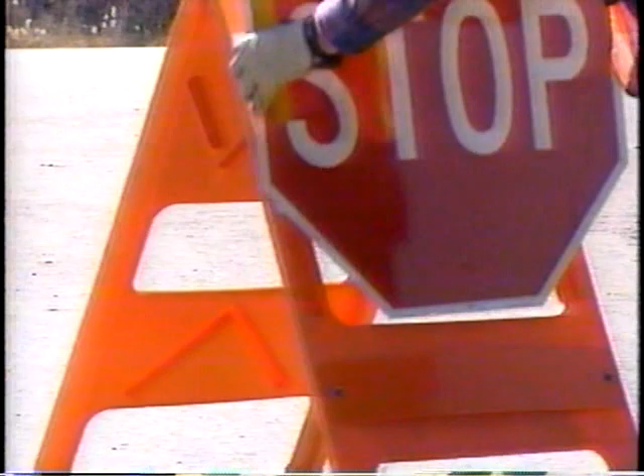This is a well-organized county with trucks that always carry key signs and necessary equipment so they can respond almost immediately to a dangerous situation. But they do much more than that to maintain signs in this rural county, and that's what this video is all about.

We'll show you a procedure that keeps track of all the signs in the county and sets priorities for needed maintenance and tracks that maintenance. You'll also see examples of the proper use of traffic control devices and typical field operations using the appropriate equipment for a specific job, the tools needed, and proper placement of signs.

We're going to take a closer look at each of these areas now here at the Riley County Road Maintenance Facility in Manhattan, Kansas.

Hi, Ken. Well, Ralph, how are you today? I'm fine, how are you? Ken, you've got a big county here, and it's mostly rural roads. I'm curious as to how you keep track of all the signs and markers, and as far as that goes, how do you know when a sign needs to be maintained?

Our traffic control department makes a regular inspection of all our roads. The low volume roads we do on a monthly basis, and our high volume roads we do every 2 weeks. We also do an annual nighttime inspection visually and drive all the roads. We also back this up with a retroreflectometer test.

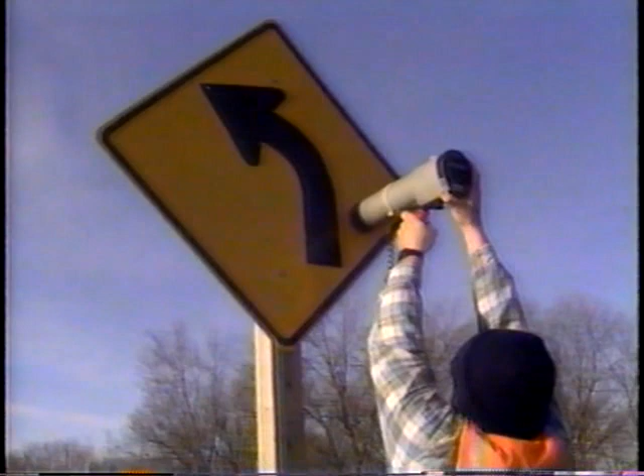I won't ask you to pronounce that again, but what is that? That is a device that will check the reflectivity of the sign and give us a meter reading as to the quality of the sign.

So after you've determined there's a problem, what's the procedure then? Any of the problems we find on these inspections would be put on a complaint form.

So there must be quite a pile of those things. How do you handle that? Well, the emergencies we take care of as soon as possible. The other problems are put on a work order master list from the complaint forms, and we have a large list. Then I assign that to the traffic control foreman, who prioritizes his work and schedules it on a daily basis to go to his crew.

So by keeping good records of all the problems reported in inspections, employee observations, or citizens' reports, you prioritize the needed maintenance, schedule and assign the work, and then record what the job involved and when it was completed. That must give you a pretty detailed history of about every sign in the county.

Yes, it does, and recently we converted all this information to a computer database so we can access it much quicker and easier. Well, Ken, I'll let you get back to work.

Thank you very much for the information. Appreciate you coming in. Thank you very much. Thank you.

The next step is out here. Before going out on the road, the repair trucks need to be equipped with the right signs and, of course, the right tools.

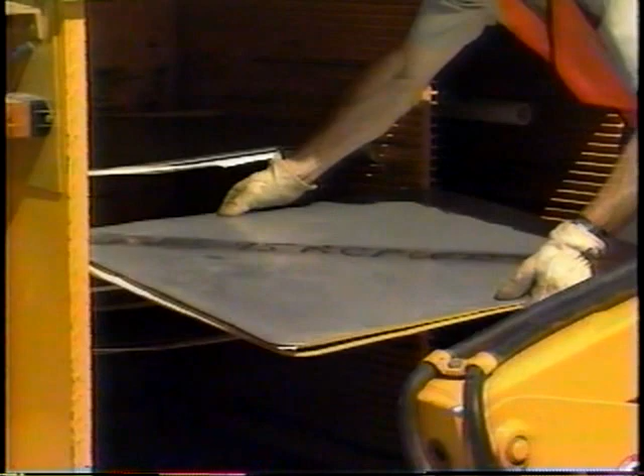All the key signs are kept on the truck, and they require special care. Whether stored vertically or horizontally, the sign face must be protected by placing some kind of packaging or protective wrapping between each and securing them so they don't rub against each other, keeping the packing material dry.

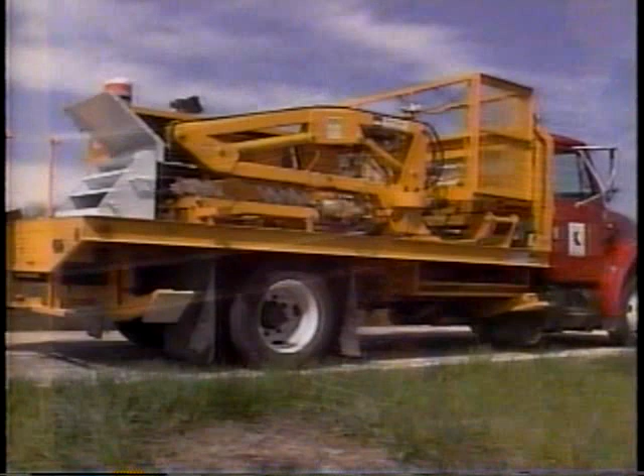A comprehensive list of common and necessary equipment and tools can be found in the pamphlet Maintenance of Small Traffic Signs. However, here are some not-so-common items found on Riley County trucks. Because of the flexible nature of carsonite posts, it's recommended you attach only one blank.

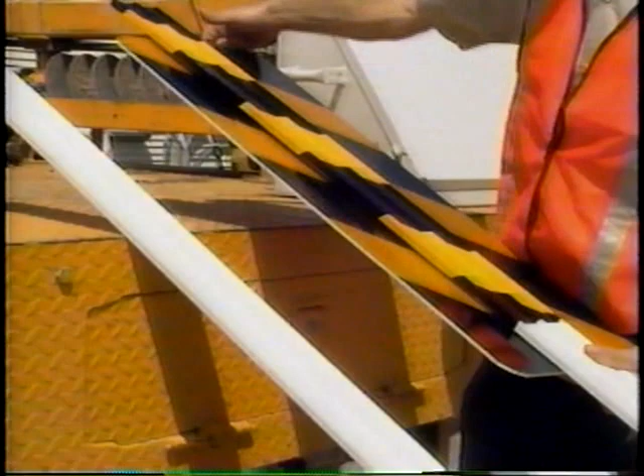On occasion, Riley County wanted the sign to be visible from both directions, so they made this modification. A face was applied to both sides of one blank, and the carsonite post was painted to match.

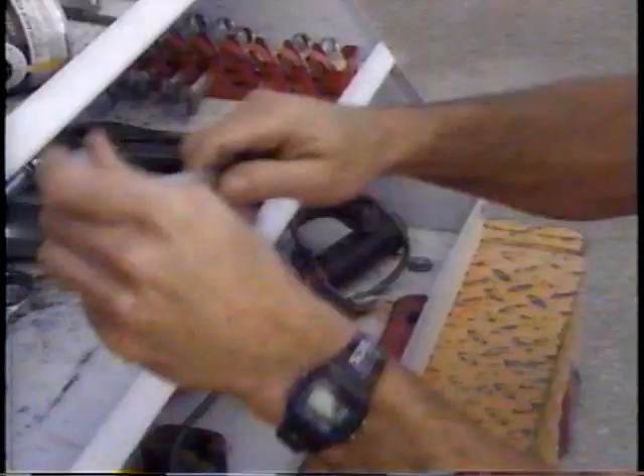The handle of this wrench was bent to facilitate the installation of tough nuts up next to the post. Tough nuts and Loctite are used with carriage bolts because they discourage vandalism.

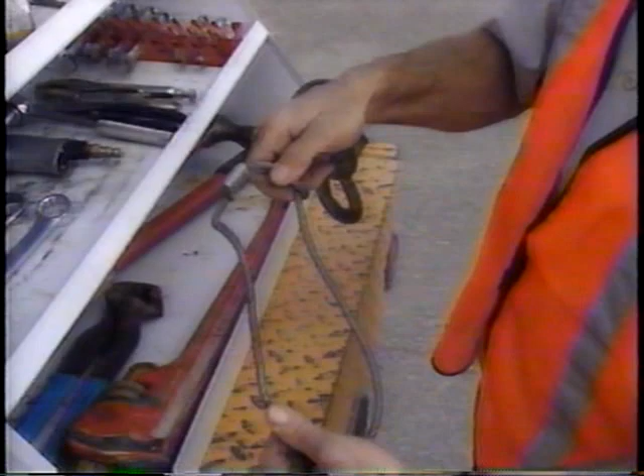A looped cable was made so it tightens around a wood post as it's pulled. This device is exactly 5 feet high and used to check the height of the bottom of a sign from the edge of the traveled way during installation.

All Riley County sign trucks are equipped with a ball bank indicator to frequently check curves and turns, and a distance measuring instrument, which determines the longitudinal placement of signs.

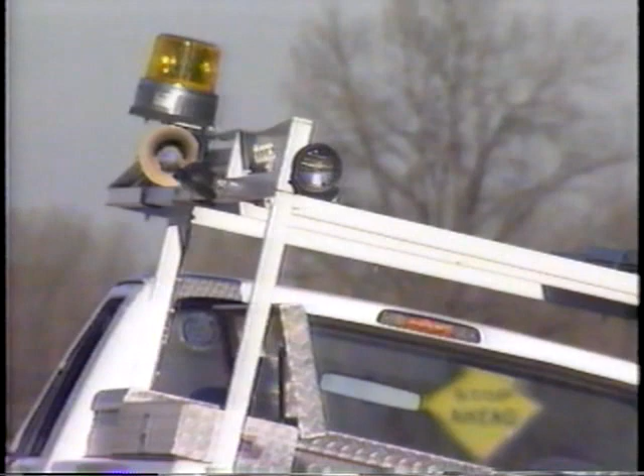Every truck should have these items for the protection of the crew: hard hat, gloves, ear protection, back brace, orange safety vests, cones, warning barricades, and flashing beacon. They also carry the Manual on Uniform Traffic Control Devices and the Kansas Handbook for Low-Volume Rural Roads.

We're going to show you 4 typical but very important operations: minor maintenance, sign and post installation, using a ball bank indicator to determine the need for either a curve or turn sign and if a speed advisory plate is required, and finally, object markers and delineators.

For each of these operations, we'll stress conformance to the standards and guidelines in the Manual on Uniform Traffic Control Devices, the Handbook of Traffic Control Practices for Low-Volume Rural Roads, and the Maintenance of Small Traffic Signs. Minor maintenance is our first example.

Chuck noticed this sign en route to another location and has decided to repair it now. Even though Chuck will be stopped for only a few minutes, he follows the appropriate procedure for traffic control.

He parks in the direction of traffic and as far off the road as possible with the truck's warning beacon flashing. He places an advance warning sign where it can be seen by approaching drivers and sets out cones to channel the traffic around the work area.

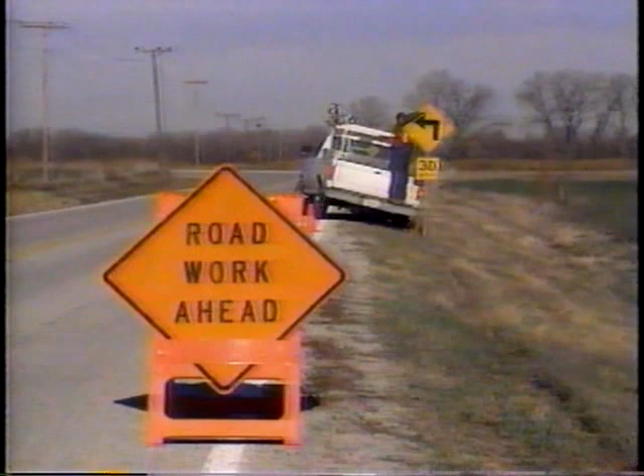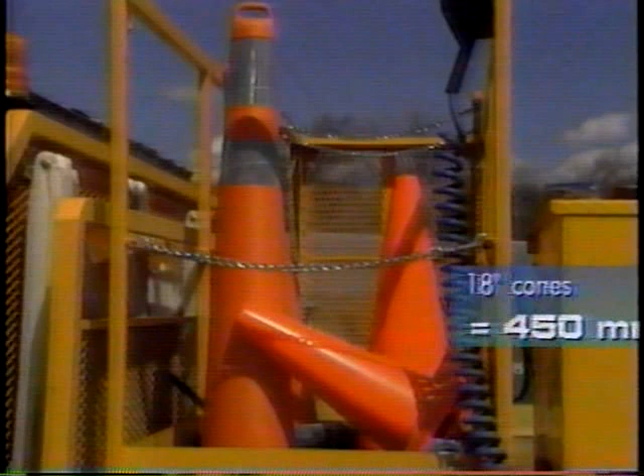On low-volume roads, that is less than 400 vehicles a day, with speed limits of 55 miles an hour or less, 18-inch cones are used. On roads with speed limits above 55 miles an hour, or when working at night, 28-inch or larger cones with reflective strips are used.

Since speed limits, traffic count, sight distance, and location conditions influence the kind of safety work zone needed, work crews need to be familiar with the guidelines in Part 6 of the Manual on Uniform Traffic Control Devices.

The rear bumper is a heavy-duty bumper with a non-skid surface to allow Chuck to safely stand on it.

After tightening the tough nut on the carriage bolt, Chuck applies Loctite, one brand of fluid that keeps the bolt from working off. While the manufacturer recommends applying the fluid to both the bolt and nut, be aware that it will make removing the tough nut almost impossible.

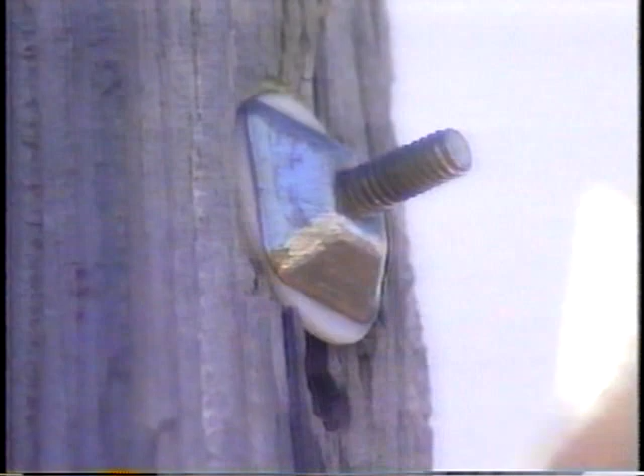The job isn't finished until the work has been recorded. This is very important, not only to keep the inventory and work schedules current, but also to help protect the agency in any tort liability cases.

Replacing a sign and post is our second field operation.

There are several types and sizes of posts. Which one is right for the job? Two things must be considered. First, safety. For successful, safe performance, a post must bend and lay down or fracture when hit without causing excessive damage to vehicles.

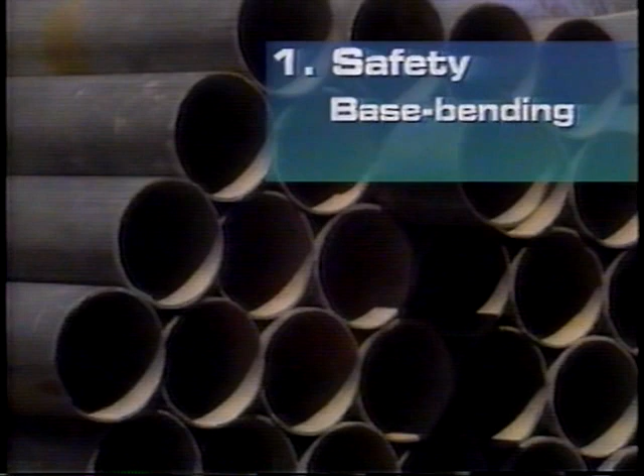Base-bending metal signposts have been used for many years to provide effective economical support for signs. A base-bending metal post has no built-in breakaway or weakened design. Steel U-posts, standard steel and aluminum pipe posts, square steel tube posts, and X-posts are all base-bending metal signposts.

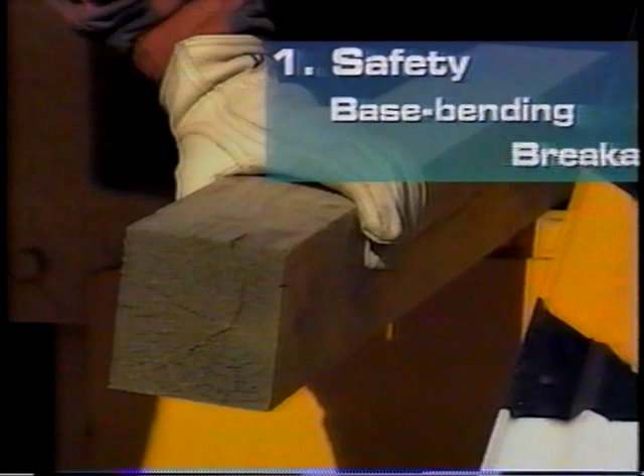Wooden posts up to 4x4, on the other hand, are considered breakaway posts. Larger wooden posts must be drilled to assure they'll break away when hit. Secondly, whether metal or wooden, all posts must be sized properly based on the type of sign they will support.

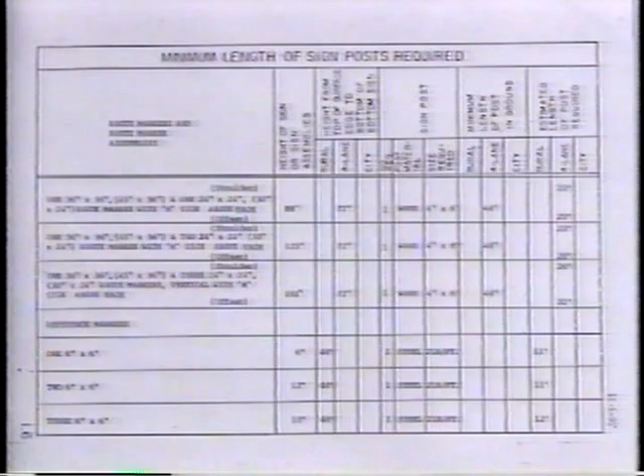Here's an example of a table provided by the Kansas Department of Transportation. The appropriate post for each size of sign and the minimum length of post in the ground can be determined. Suppliers also provide similar tables.

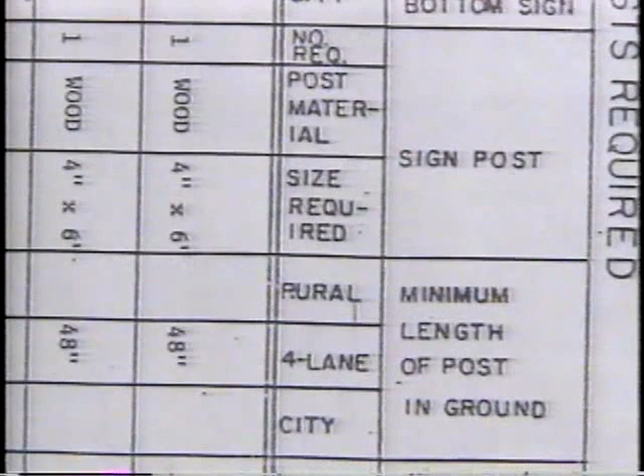The guidelines in the Manual on Uniform Traffic Control Devices are based on a typical situation. It states that normally, signs should not be closer than 6 feet from the edge of the shoulder, or if no shoulder, 12 feet from the edge of the traveled way.

In many local roads and streets, particularly in rural areas, these distances would be unrealistic or impractical. And on rural low-volume roads with no shoulders and narrow right-of-way, 6 to 12 feet would put the signs in weeds and bushes. So the following guidelines should be followed.

All signs should be at least 2 feet outside the shoulder, or if none, 2 feet outside the traveled way, to avoid being struck by large vehicles.

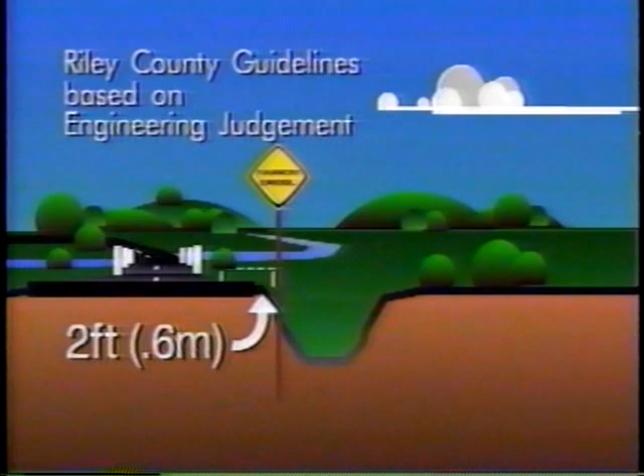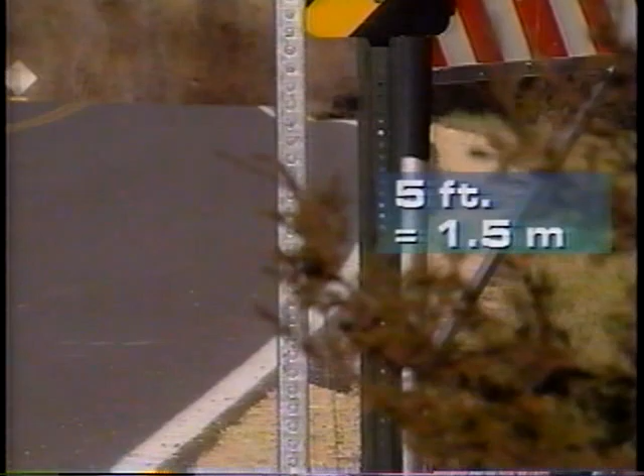Signs erected at the side of the road in rural districts are to be mounted at a height of at least 5 feet, measured from the bottom of the sign to the near edge of the traveled way. In business, commercial, or residential districts, this height is 7 feet. The height to the bottom of a secondary sign may be 1 foot less than the normal height.

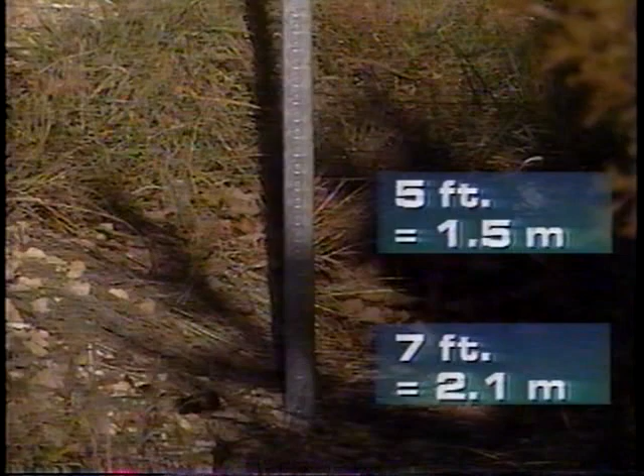A routine inspection found this warning sign leaning over. The ditch was partially caved in, so the new post will need to be driven in a different place.

Before any new hole is dug, even if only a few inches from the previous one, you must check with all utility companies. Severing a buried cable can be dangerous and costly. So the sign supervisor called DigSafe, a utilities clearinghouse here in Kansas, before assigning the job to Doug.

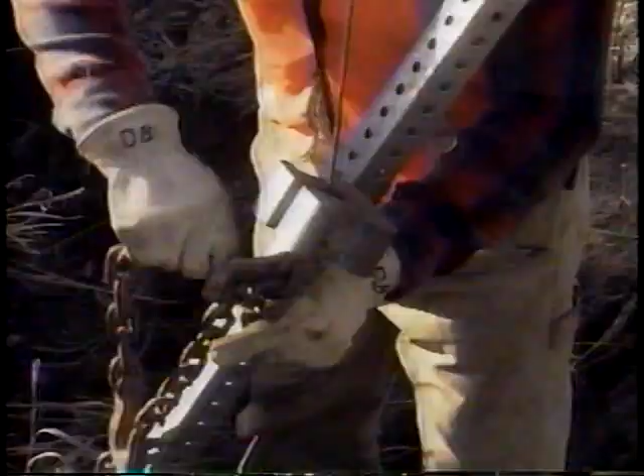After detaching the sign, Doug removes the old post with a hydraulic post puller. The post driver is attached to the crane and elevated so the post can be inserted in the driver. It's good procedure to clean the quick couplers of the hydraulic hoses before connecting.

Before driving the new post, Doug measures first the sign, then the post, marking where the bottom of the sign will be. This mark is his guide for driving the post to the proper depth. The new hole will be about a foot from the old one and is within the proper guidelines for distance from the edge of the traveled way.

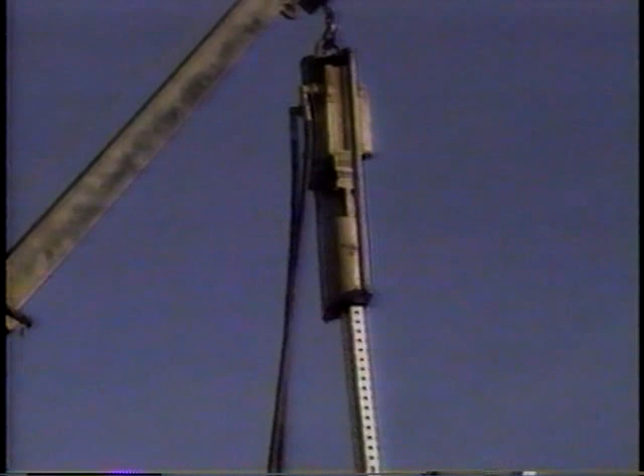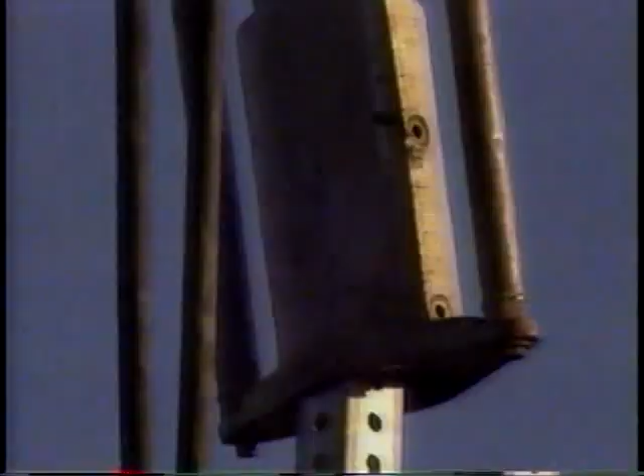While driving the post, Doug keeps track of the depth and uses a level to make sure the post is straight.

When the post is at the right depth, the height of the mark is checked from the edge of the road. It is at the proper level, 5 feet. The sign is then bolted to the post using carriage bolts, tough nuts, and Loctite. And again, the work is not finished until it's recorded.

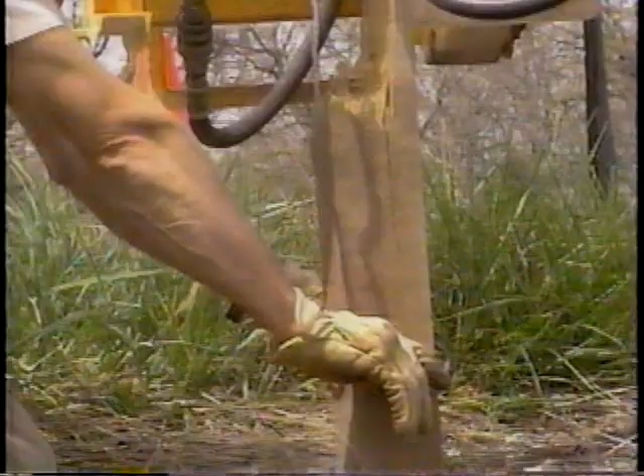Here's the procedure for replacing a wooden post. The modified cable is used to pull the broken wooden stub. The sign is bolted to the post.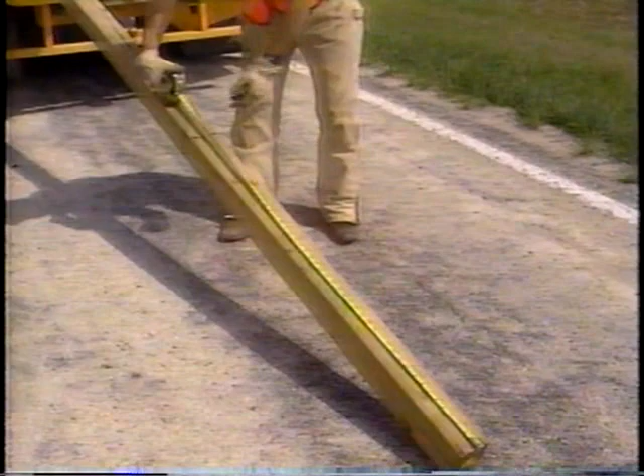A mark is placed 5 feet from the bottom of the sign. The remaining length of the post from that mark to the bottom of the post is measured. This is how deep the hole must be dug if the shoulder is level with the road. If the shoulder slopes downward, a longer post may be needed to make sure the minimum length is in the ground.

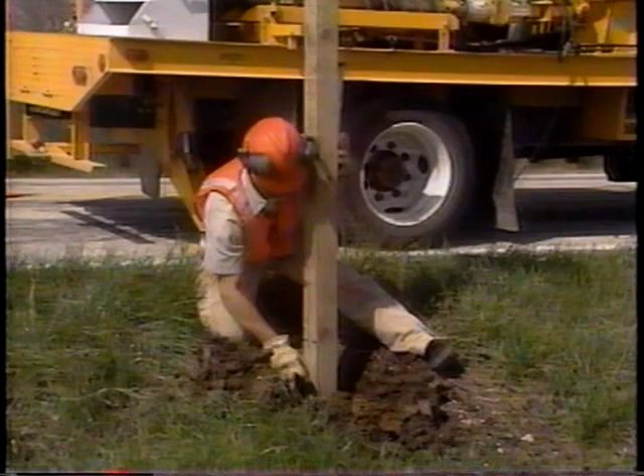Before filling the hole, the height of the bottom of the sign from the edge of the traveled way is rechecked. It's very important that the soil be tamped for stability as the hole is filled, and that the vertical level is checked.

When a sign needs to be placed where there is solid rock, a jackhammer can be used. Or when there is no solid base, such as this area, concrete may be used.

Curves in the road. When do they need a warning? Is it a turn or a curve? And what about a safe speed advisory? How you determine the answers to these questions is our next subject.

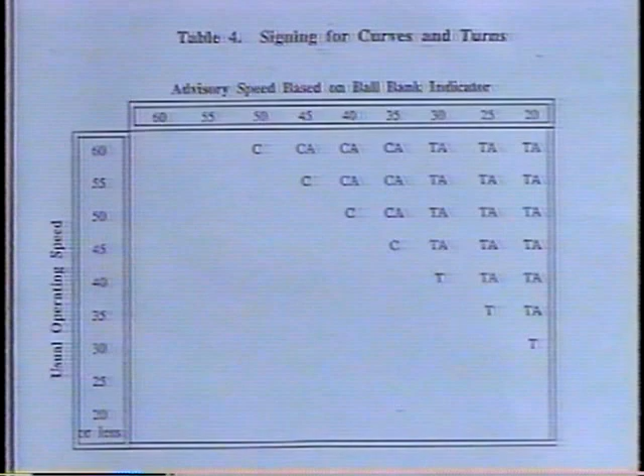The Kansas Handbook of Traffic Control Practices for Low-Volume Rural Roads recommends the use of an advisory speed plate when the advisory safe speed of the curve is more than 10 miles an hour lower than the approach speed limit or the prevailing approach speed. This handbook also has a table to help determine when a curve or turn sign is needed and if an advisory speed plate is necessary.

When the advisory safe speed of a curve is 30 miles an hour or less, a turn sign is used. When the advisory safe speed of a curve is greater than 30 miles an hour, a curve sign is used. The key is knowing what the advisory safe speed is for each curve.

The accepted practice is to use a ball bank indicator to determine what that safe speed is. When installed in a perfectly level vehicle, the indicator should read 0. Maintaining a smooth and steady speed, several runs are made through the curve. The first run should be made at a speed somewhat below the anticipated maximum safe speed, with subsequent runs at 5-mile-an-hour increments.

If a ball bank reading of 14 degrees or greater occurs at 20 miles an hour or less, the advisory safe speed is below 20 miles an hour, meaning a turn sign is needed. If a ball bank reading of 12 degrees occurs at a trial speed run of 20, 25, or 30 miles an hour, then the speed at which it occurs is the advisory safe speed and a turn sign is needed.

A ball bank reading of 10 degrees at trial run speeds of 35 miles an hour or greater indicates that the safe advisory speed of the curve is 35 miles an hour or greater, so a curve sign is needed. The advisory safe speed is then compared to the established or prevailing speed limit. In this case, the speed limit is 55 miles an hour, which is more than 10 miles above the advisory safe speed of 35 miles an hour, so an advisory speed plate is required.

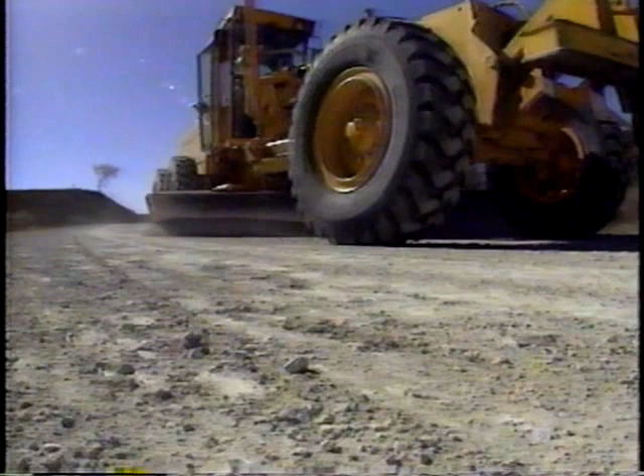Curves, especially on unpaved roads, frequently have their cross sections changed, and that can change the ball bank reading. Every time your grader operator grades a curve, the ball bank reading could change. Because many factors affect the surface of the road, ball banking curves is an ongoing process. All Riley County sign trucks have ball bank indicators mounted permanently on the dashboard, so they can frequently ball bank the curves.

Our last field operation involves object markers and delineators. Object markers are used to mark obstructions in or adjacent to the roadway. There are three main types: Type 1, Type 2, and Type 3. Type 1 and Type 3 are used for obstructions within the roadway. Type 2 and Type 3 are used to mark obstructions adjacent to the roadway.

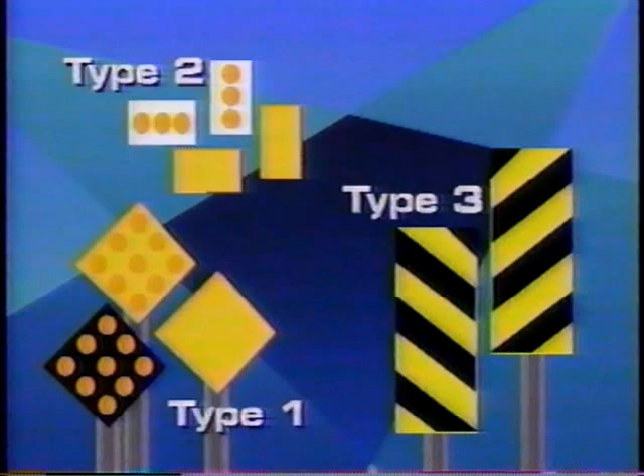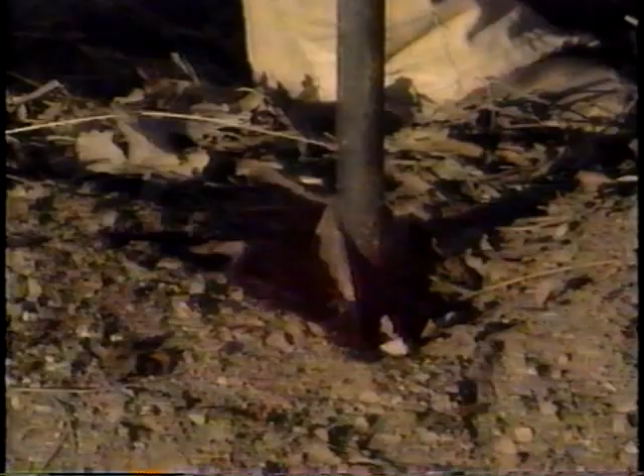Here, a Type 3 object marker near a bridge abutment needs replacing. For this type of post, a special pilot driver is used to make the hole. A flexible carsonite post is used because it can withstand being hit occasionally by farm equipment. The new post is marked where the bottom of the sign will be, and it also requires a special post driver.

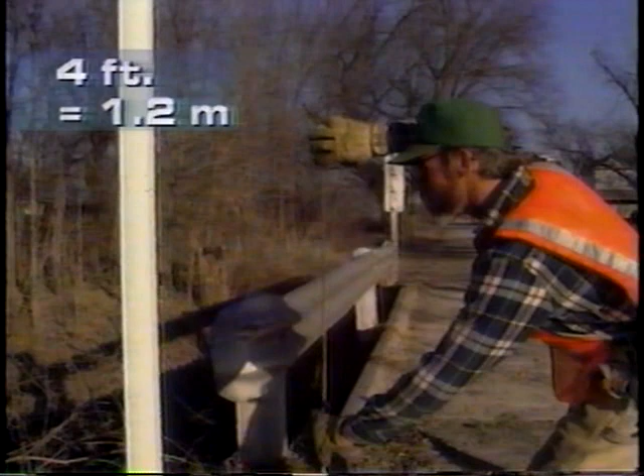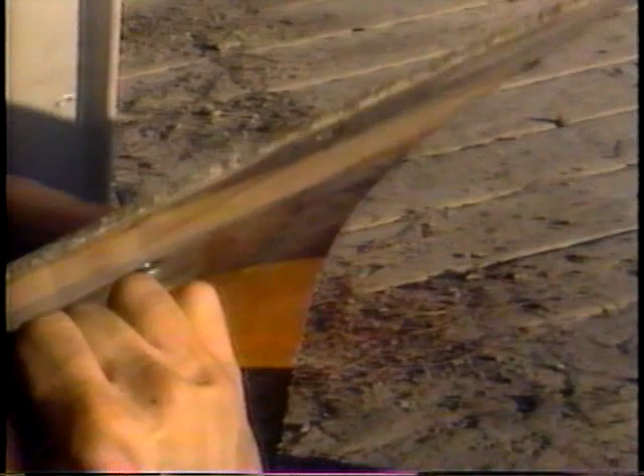As you can see, this is a very flexible type of post. Use caution when removing the driver. The post is driven to the appropriate depth for the bottom of the sign to be 4 feet above the surface of the road. The Type 3 object marker is attached with rivets, and spacers are placed between the sign and post. And of course, the work is always recorded.

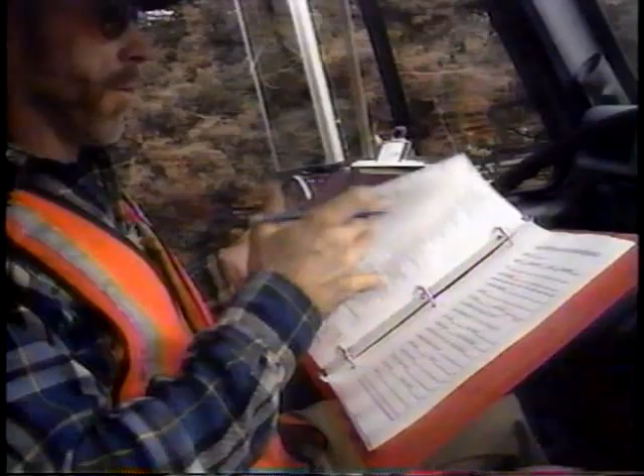Delineators indicate the horizontal road alignment. On gravel roads, they are the only indicators.

We've shown you a system of tracking and recording problems, the signs and equipment necessary for proper maintenance. We've demonstrated some typical maintenance operations following the guidelines in the Manual on Uniform Traffic Control Devices, and we've also used the Kansas Handbook on Traffic Control Practices for Low-Volume Roads. Most states have similar manuals to this.

But what makes it really happen? We asked the Riley County Director of Public Works. If you operate a proper signing program, where you're into signage maintenance, where you're concerned about the proper sign, the proper placement of the sign, and then once it's been placed, the proper maintenance of that sign, that is an expensive undertaking. However, if you choose not to do those things, the alternative is even more expensive.

And we also invest fairly heavily in our personnel. Everybody from the people doing the design to the people actually physically placing the sign in the field goes through some fairly extensive training. So it ultimately boils down to people like you doing this job right, doing it right the first time, and doing it every day.